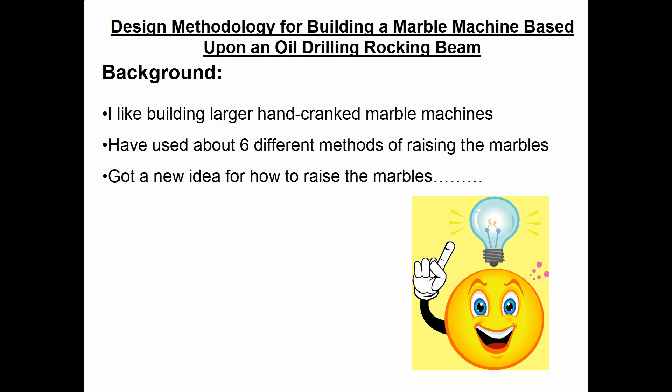A little background information: I like building the larger hand crank marble machines. I've built 6 or 7 of them, using 6 different ways to raise the marbles up. But then I got a new idea for another method of raising the marbles.

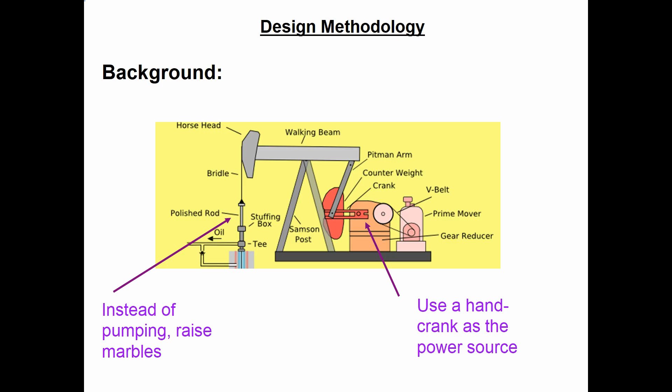If you've ever driven through an oil field area, you've likely seen those slow moving pumping arms. Those are actually oil pumps raising oil out of the ground up to the surface. Here's a typical diagram for one, and they usually use an electric motor to run the mechanism, but I could always substitute a hand crank as the power source. Instead of pumping oil, I could use it to raise marbles for a marble game.

I faced about 4 different engineering design challenges coming up with this marble model. The first is the main linkage: how do you design the linkage lengths so they package inside my envelope? I like to keep them no more than 30 inches long, 12.25 inches deep, and 25 inches high. I also want to lift the marble as high as I can, and I'll likely use 2 mechanisms to do that.

Another challenge will be coming up with a piston design. The third challenge will be coming up with a loading mechanism that only loads 1 marble at a time. The fourth and last challenge will be coming up with a worm gear design.

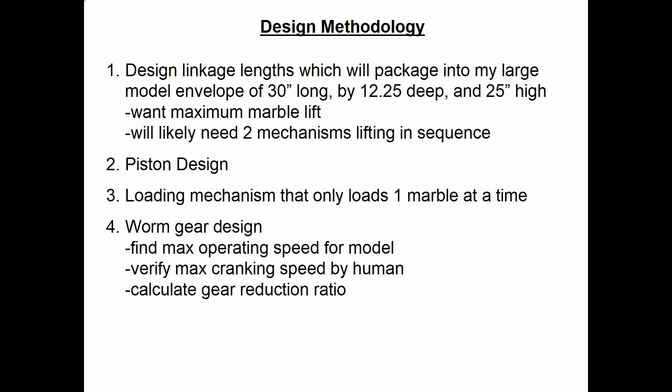I need to find the max speed the model will operate at, and then verify the fastest speed a human can crank. Once I know that, I can calculate what gear reduction ratio I need on the worm gear.

So when I first started this project, I started designing the main 4-bar linkage, and I discovered it's hard to design a 4-bar linkage just using the SketchUp drafting program. It turns out you have about 3 key inputs: the length of the crank arm, the distance from the end of the crank arm to the rocking beam, and the length of the rocking beam. There's no way to easily visualize the relationship between the inputs and the outputs here, because you've got 3 inputs and 1 output.

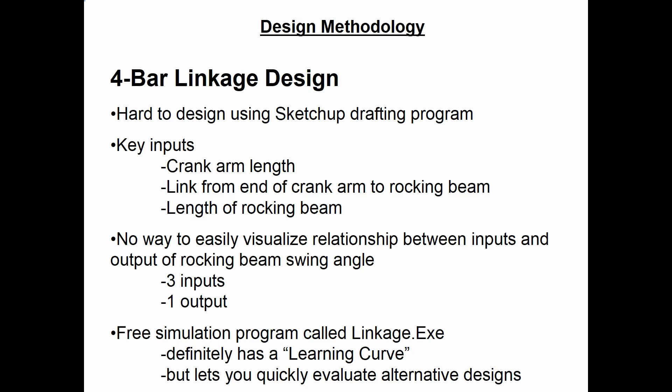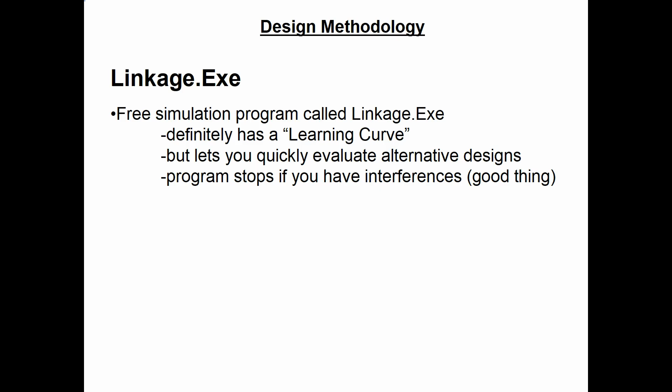You can't just use an X, Y, and Z graph to give you a feel for the model. However, I did know about a free simulation program called Linkage.exe. There's definitely a learning curve involved with using it, but it does let you quickly evaluate alternative designs. One good thing about it: if you try to design a linkage that will actually have interference with itself, when you try to run the simulation, the program stops and tells you that you have a problem, which is a good thing.

So here's the process I ended up using with the Linkage.exe simulation program. First, I developed a concept in SketchUp, and got the XY coordinates for each of the key points in that design. I set up an Excel spreadsheet, which we'll look at in a minute. I input each of the key points into the linkage program, ran the simulation, and measured what the rocking beam swing angle was. I entered that into Excel, and kept modifying the design until I thought I had the best design I could get that would still package within the 3D limitations I noted before.

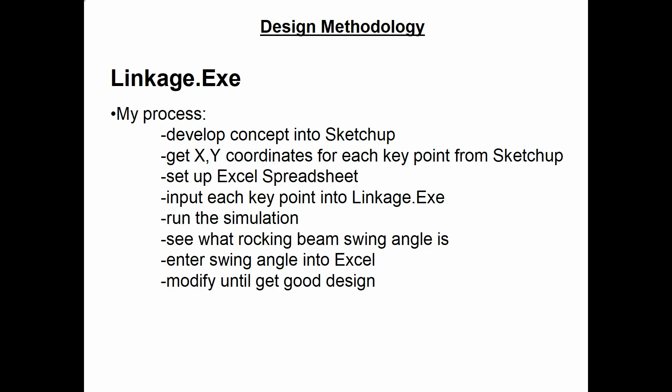If we zoom in on the simulation in the Linkage.exe program, you can see on the right is the rotating crank. It has a connecting link which takes it up to the rocking beam, which rotates back and forth about 45 degrees. Over on the left hand side would be where our piston is going to travel up and down in a vertical direction.

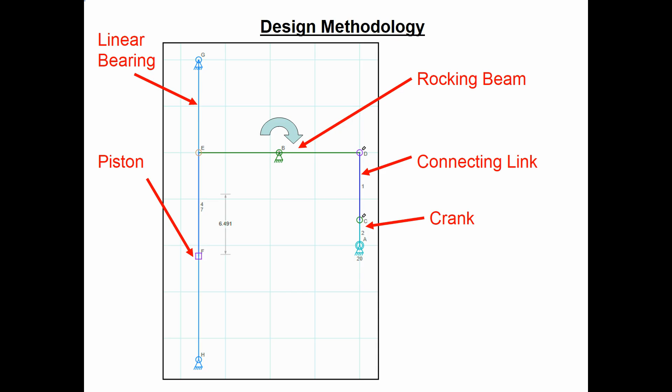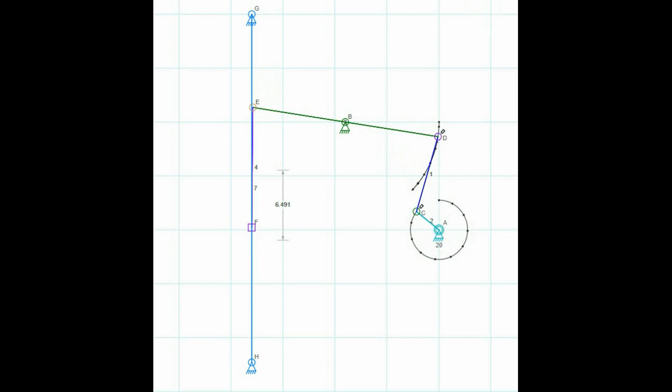Now here's a video of the main 4-bar linkage actually running in the simulation program. You can also turn on certain points and have them trace the movement, which you can see on the right. You can see the arc that the rocking beam travels through, where the crankshaft's going around the fixed point, and on the left you can see the piston moving up and down.

One thing I learned about 4-bar linkages in this project: if you don't have the relationship right between the key elements, your mechanism will actually jam up. You can calculate that and make sure it's going to work. So I set up that Excel spreadsheet I talked about earlier, where I could calculate that critical dimension and make sure I knew whether it was going to work or not.

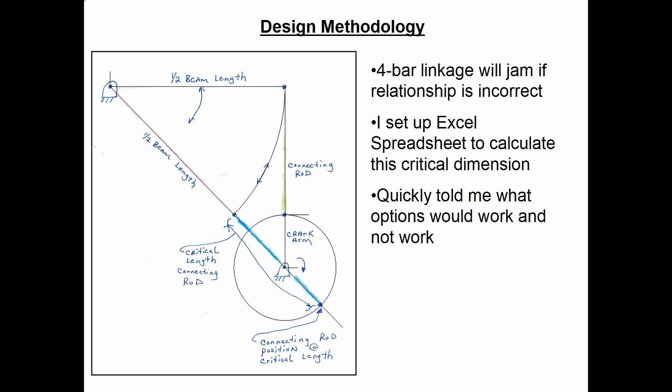It's very handy. Now here you can see that Excel spreadsheet that I set up for this project on the 4-bar linkage design. The best option I found was the crank arm would have a 2 3/4, 2.75 inch length. The connecting length would be 7 1/4 inches long, and the long rocking beam would be 18 inches total, or half of that would be 9 inches. With this setup, it gave me about 6 inches of piston lift.

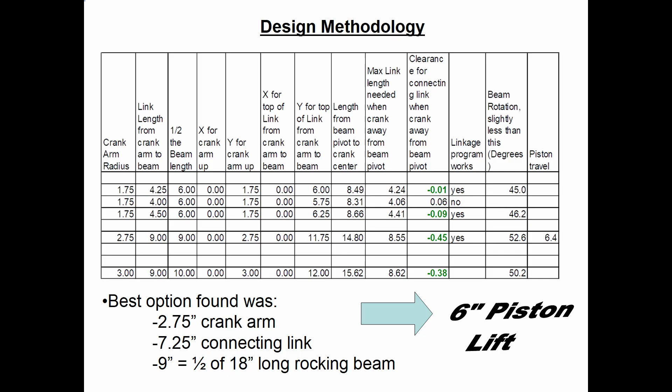Once I arrived at the best 3 lengths for the 3 critical elements, I modified my SketchUp drawing, and here's what the final result actually looks like in SketchUp. You can see the main center rocking arm, and then there's a right link hanging down to the crank arm, and the left one hanging down will go to the piston.

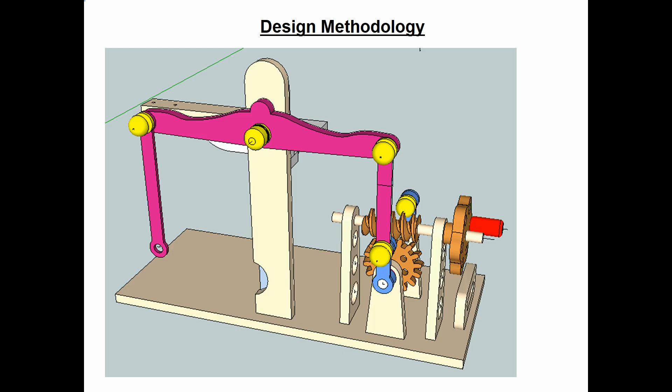So we've now completed the design of the lower walking beam portion of the model, and then we'll duplicate that for the upper level. It has the same length of rocking beam, but I had to adjust the link lengths because that second piston is going to raise the marble up from about 6 inches up to a final height of 12 inches. The first piston took it up from 0 inches up to 6 and then dumps it off to the second piston.

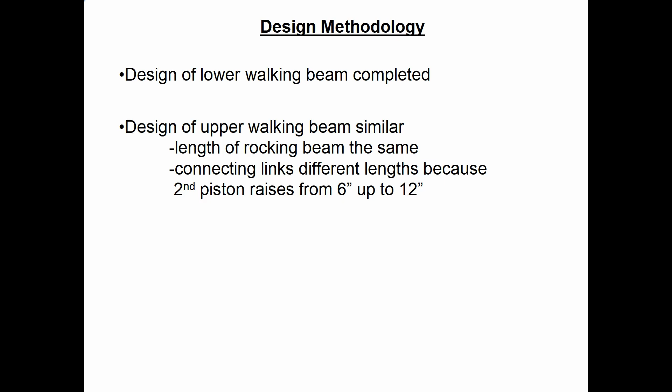Now in some of my past large marble projects, the carrier for the marble, or in this case we'll call it the piston, that's been one of the toughest things to design. But this one wasn't too bad.

I decided to use a linear bearing type design for the piston, where each piston is guided by 2 dowels that are 1/4 inch in diameter. I am using 1 inch diameter marbles, and then down at the bottom of the piston I'll drill an 1 1/8 hole, a little bigger than the 1 inch marble, and I'll put that at 6 degrees so gravity will cause that marble to flow to the other side of the piston.

Then I'll use a vertical board to keep that marble from falling out while it's traveling up, and once it's up I'll let it drop off to a chute.

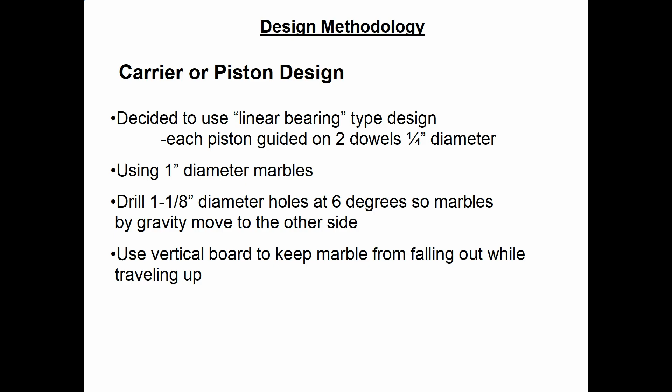Okay, so at this point we have the basic 4-bar linkage with a rocking beam designed. We also have the piston designed. So next I need to figure out, when the marble returns back to the beginning, how do we load it into the lower piston? So I'll have a chute which will load it into the lower piston, but I only want 1 marble to load per stroke.

So I need an escapement. In the clockmaking business it's called an escapement. I need an escapement type mechanism that only allows 1 marble to load per stroke of the piston. And how do I actuate that escapement mechanism? Well, I decided to let the bottom of the lower piston push down on a link, which in turn will raise an indexing arm up, as we'll see in a minute.

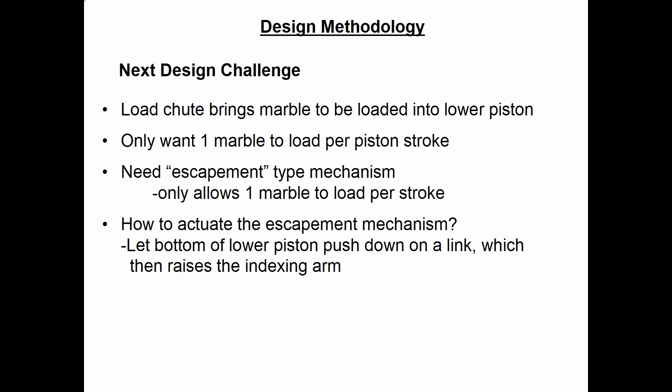So I think I fully designed this escapement mechanism just in SketchUp.

It only has 3 linkage bars, so it's not near as bad as a 4-bar linkage to design in SketchUp. However, one could also use the Linkage.exe program to help design the links, and I went back and did that. So my process was to develop the design option in SketchUp, and then get the X and Y coordinates from SketchUp.

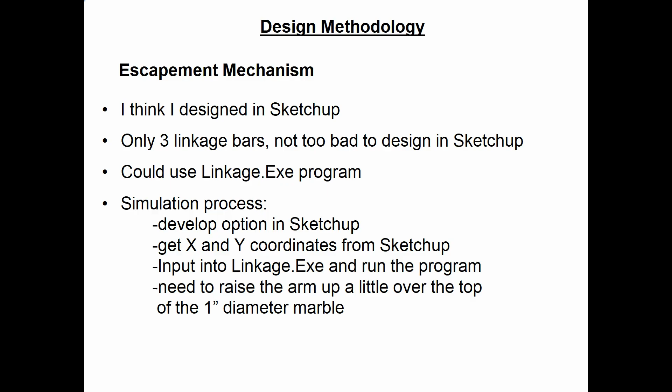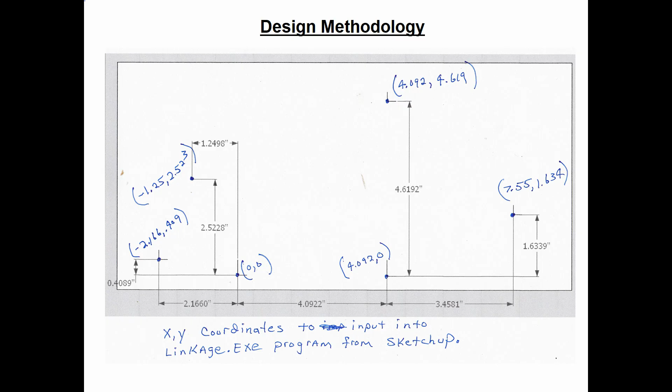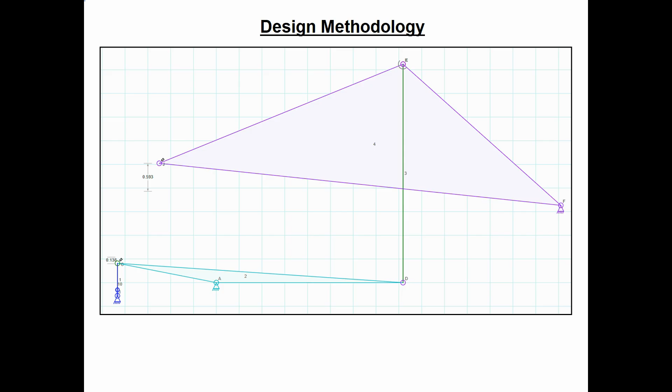Now here's what the escapement mechanism, or loading mechanism, looks like after I input it into the Linkage.exe program. In a second we'll run the program and you can see what happens.

The bottom left hand side is where the lower piston comes down and pushes down on the linkage mechanism, which in turn raises the little piece that holds the marble in place, as we'll see in a second. So I'm using a linear actuator to simulate the piston moving up and down in the bottom left hand corner.

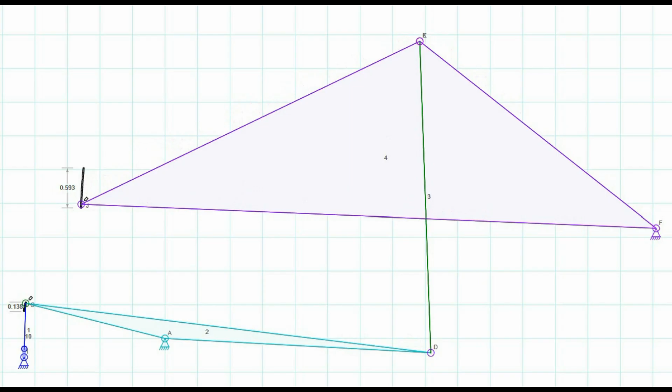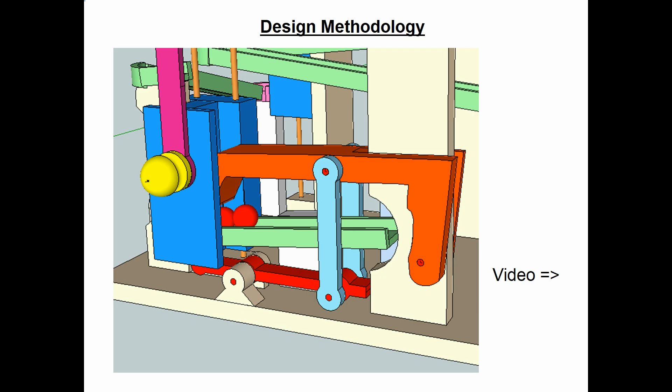And when the piston goes up, it causes that orange arm to fall down and hold the next marble, keeping it from loading.

Now here's a video of the finished model, and you see the blue piston move down and hit the red bar down below. Here it comes. It's going to hit the red bar, which is going to raise the blue bar up and the orange one up, and when the orange linkage goes up, it allows one marble to load. Now you see it go back down and it keeps the rest of the marbles in place.

Now we will zoom in just a little bit closer so you can see the mechanism a little bit better.

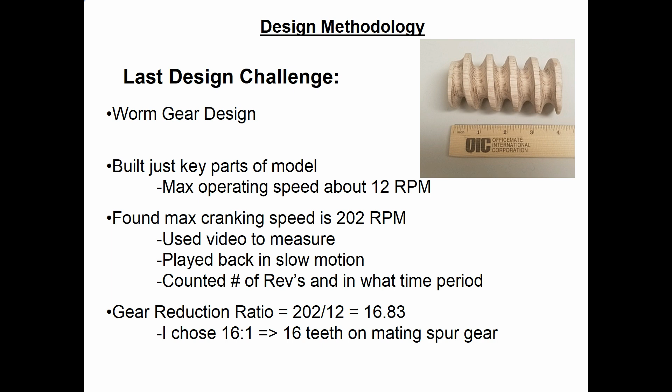So the gear reduction ratio I need is the 202 max divided by the 12 the model will run at, which is 16.8. So I rounded it off and chose a 16:1 reduction ratio, which means I'll have 16 teeth on the gear that mates with the worm gear.

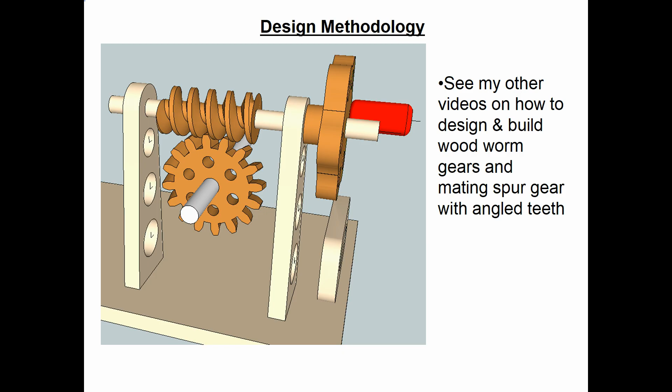So here's what the 16:1 reduction ratio worm gear setup looks like. You can see my other videos on how to design and build these wooden worm gears, and also the mating spur gear, which in this case has angled teeth to match the angle of the worm gear. Now let's take a look at the model in action, which will finish up this video.

So, some closing thoughts on this project. If you like engineering design challenges, this is a very fun project. I also learned the simulation program Linkage.exe. It can really be a valuable design aid, especially when you have 4-bar linkages involved.

So in summary, this video explains the design methodology that I used to design this new marble machine. Please see my other videos with my many other marble machines.